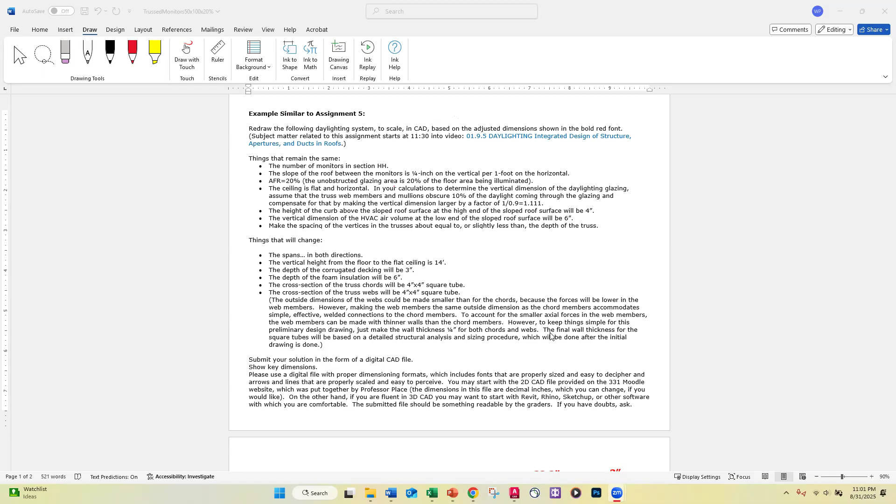So I'm going to go there, and while I'm here, I'll make another point I forgot to make earlier. I've done some projects like this, and one thing that turns out is you can do this whole window framing system, glazing system, as some variant of a curtain wall, or as what we call storefront. Both systems have a bunch of vertical mullions used to join the pieces of glass along the vertical connections, or the so-called head joints in the glass. So you have mullions top and bottom, and then a bunch of vertical mullions.

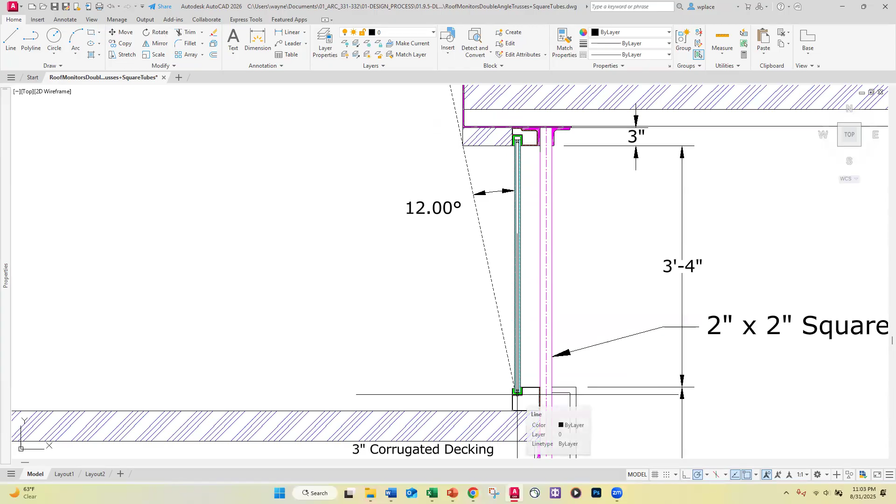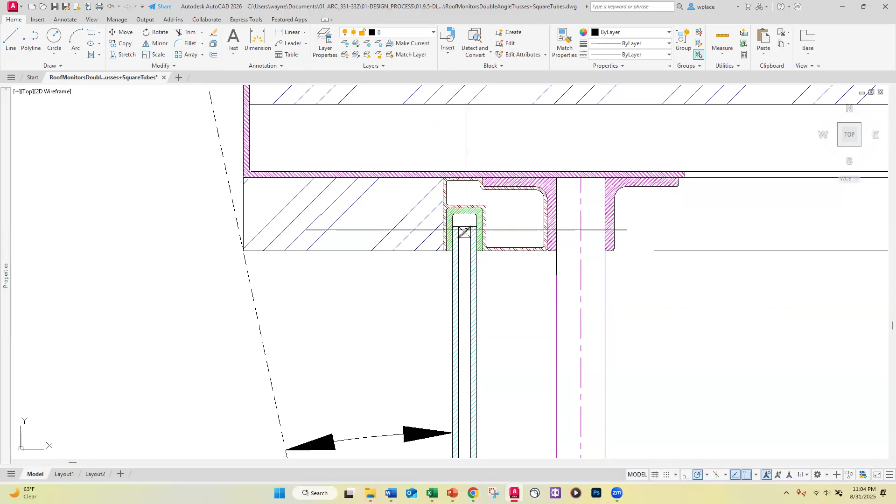You'll notice, by the way, in this troffer down at the bottom, I didn't make it as deep as the one at the top, because gravity is going to cause the glass to stay down in this 3/4 inch deep troffer. On the other hand, near the top, the structure deflects some under loads, which can be variable, like live loads of people walking across the roof, or drifting snow loads that produce unexpected deflections. To keep the glass from falling out, or alternately being crushed, we have to provide an airspace above it. So I put a half-inch airspace up there between the neoprene gasket and the top of the insulated glass panel. So that is our structure, our way of waterproofing and holding the glass in.

Now, the horizontal glass will run for a certain number of feet, which in our case probably is from one vertical web member to the next. I say that because we're probably going to put in a silicone head joint between the two pieces of glass that meet there. And while that silicone head joint is not visually terribly obtrusive, it will be visually apparent. If we put it in front of a vertical web member, it's less likely to be noticed. So we're lining up that head joint in the glass with the vertical web member, so the joint between them won't be a mullion, it will just be a silicone head joint.

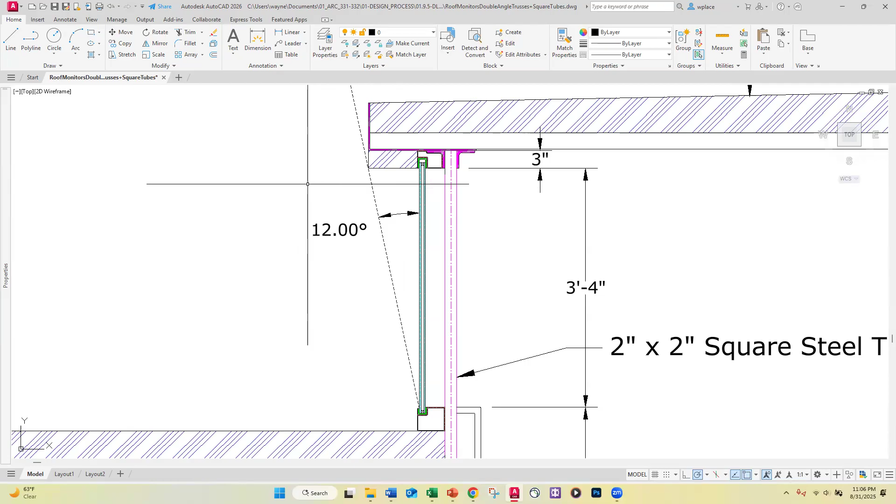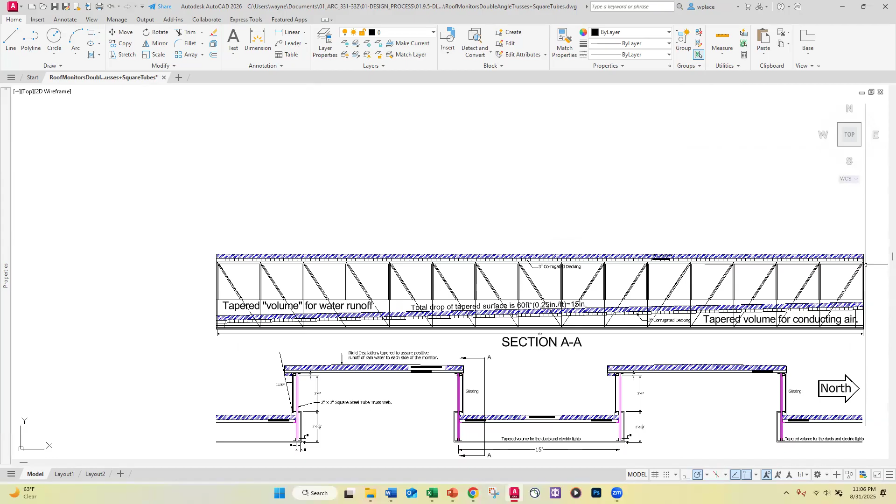All right, having said all that, now I'm going to start trying to set up our 100-foot long version. I'm going to put in a line here, and start drawing that line. I know that 100 feet is 1,200 inches, and my basic units in AutoCAD are inches. So there is a line that represents the center, the joint-to-joint dimension, which was literally from right there to right there.

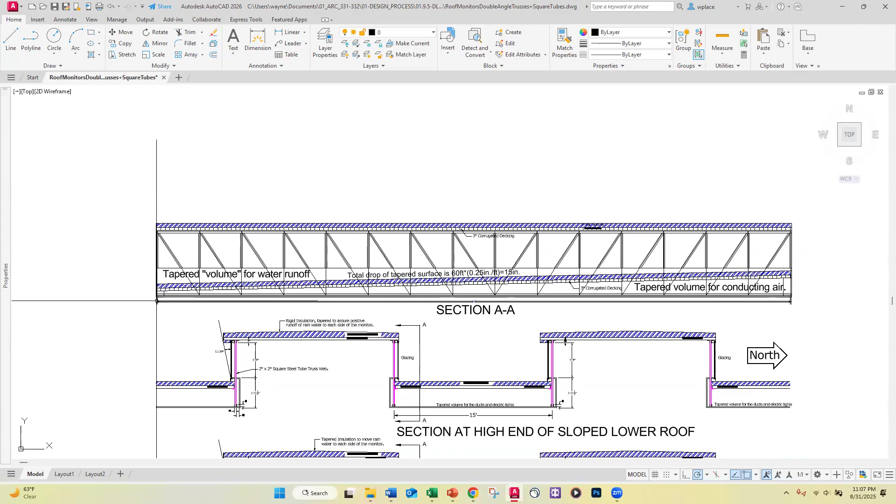Keep in mind, there'll probably be a column under this end and a column under that end, and we typically put the columns on a nice clean grid, like 100 feet. That means we'd like for this end web member, which is carrying all the load of this truss, to be aligned with the column down below.

Everything that structural engineers do works off the center lines of these members. Now typically architects want a different kind of dimension. They want to know the dimension from the top of the top chord to the bottom of the bottom chord. And in fact, for standard trusses, that's the way they're typically sold.

So the architect will specify the depth of the truss. The engineer will look at all the other situational issues and figure out where the centroids of the top and bottom chords are, based on some initial estimates of the size of those members. The engineer will then do all that analysis and come back and decide whether the original member dimensions were adequate. If they are, the architect doesn't have to redo this drawing.

But the key point is to remember that architects want to work off of attachment surfaces, like the top of the top chord and so forth. But the engineer sooner or later has to get down to the centroids. So we're going to start drawing this whole thing from the centroids.

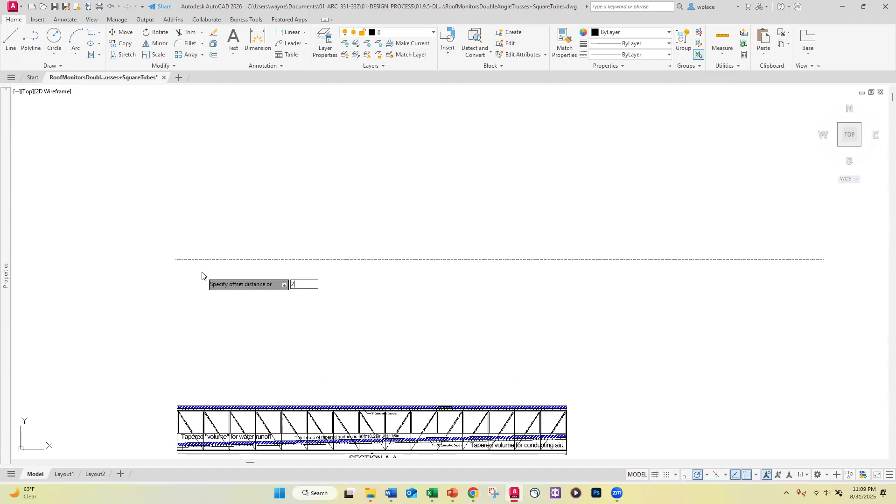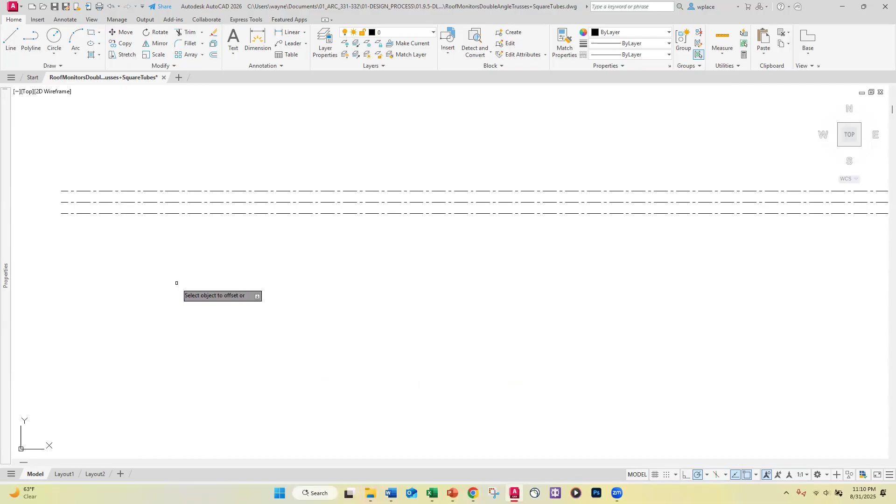So in the example I'm working, we've said that this member is going to be 4 inches deep. So I'm going to do an offset here, and I'm going to say I want 2 inches, and I'm going to offset that in that direction and offset it in that direction. Now that's the top and bottom of those chord members.

And now I don't want the dashed lines anymore. So I'm going to go back and pick a continuous line, and that defines my member.

So I have said in the past, for simplicity of this whole drawing process, we're going to put a half inch ceiling down below. So I'm going to do an offset of 0.5. By the way, in AutoCAD, you do an offset by typing the letter O and hitting return, and then you put in whatever you want that offset to be. So in this case, I made it a half inch.

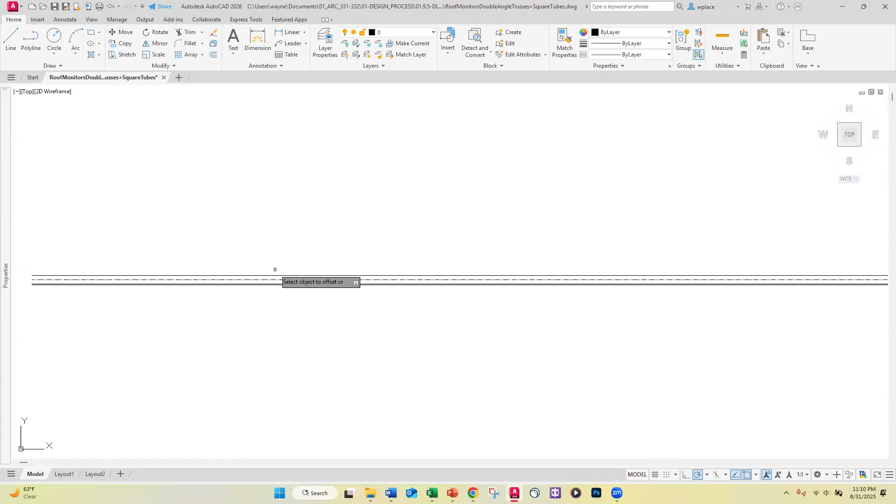So that half inch gap right there represents the sheetrock ceiling, or it's a placeholder just for the moment to remind us that there is a surface there. Okay, so now...

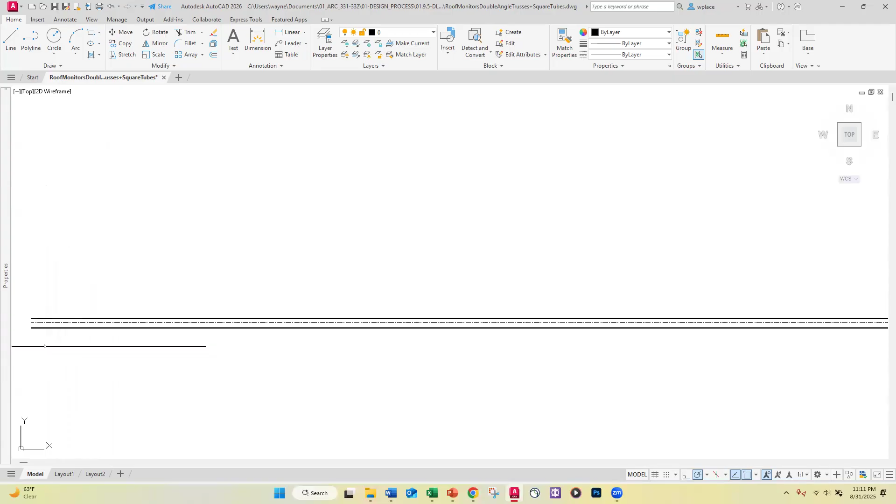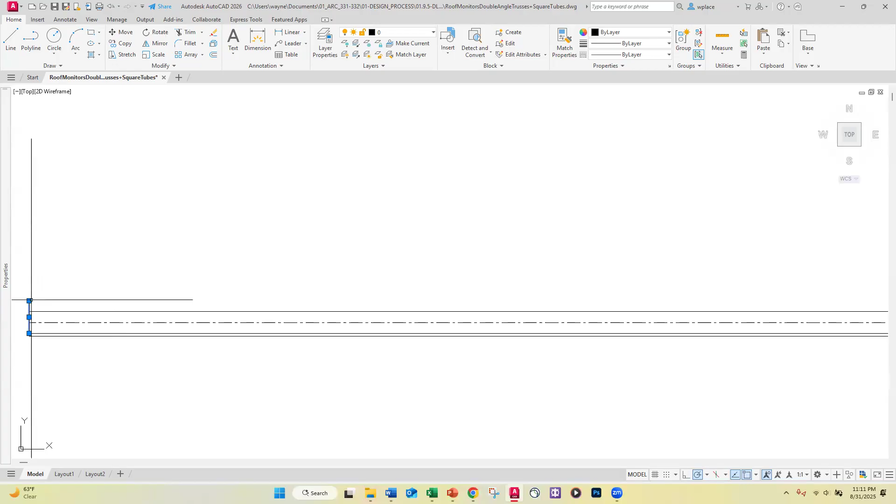Another interesting thing was that we said we wanted at least 6 inches for airflow at the end. So I'm going to come here and draw a line, a vertical line, and go up 6 inches. And then I know that my sloped roof, the bottom of the corrugations, are going to be at that point right there.

Now, I also said that I worked out the numbers, and oh, let me do the following. I have provided for you online, and I may update the numbers a little bit, but this is a glazing dimensioning tool.

And we're looking at 2 roof monitors per bay, and we've said the bay is 50 feet. As I said, you could go do this with 1 roof monitor per bay, and you could make this 25. And then we'd come over here and say, okay, we only have one of those. And then we get the same answer either way.

But I'm working with this portion here that says 2 roof monitors per bay. So that tells me that... sorry, I did something wrong here. Let me walk through this and you'll see what I'm talking about.

Okay, so the crucial line here is line 16, and I'm saying the length of the bay is 100 feet, where the length is parallel to the apertures. The width of the bay is that perpendicular direction, and it's 50 feet. And then I multiply those two numbers, so you see that in the formula up here. It's A16 times B16, which gives me the floor area that I'm trying to illuminate.

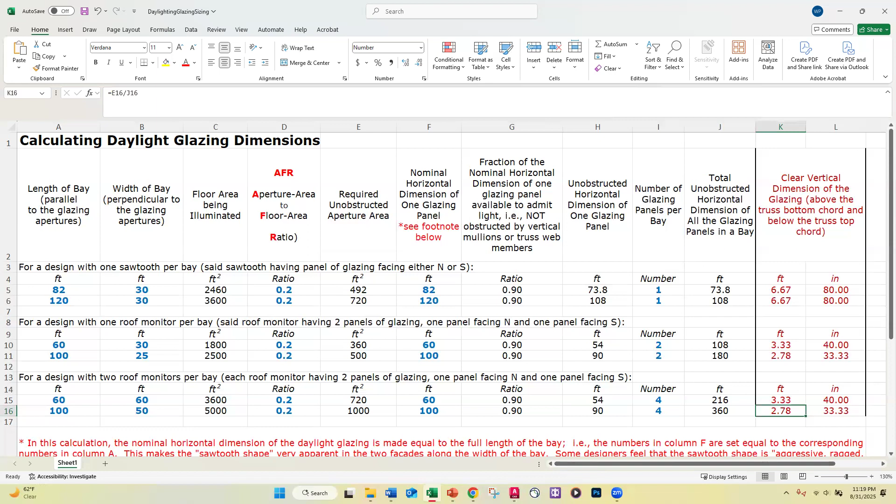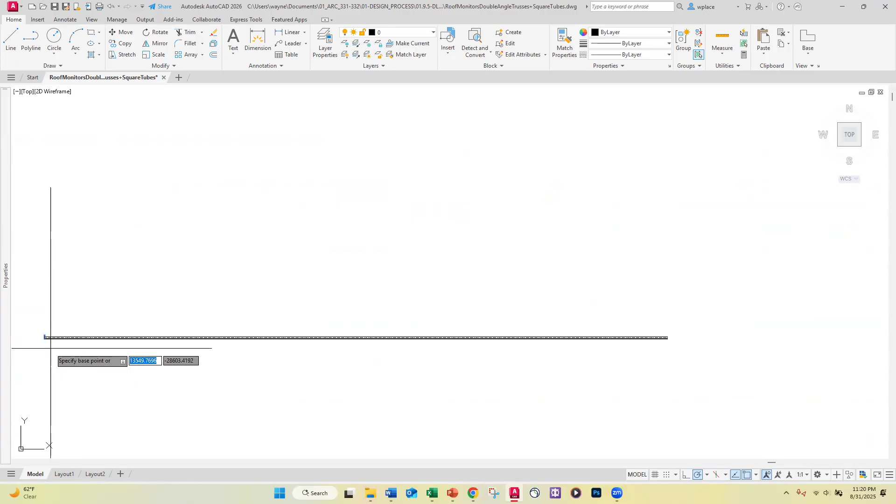So now I'm going to go back here and draw a line. And by the way, for the moment I'm going to bring this - I'm going to copy that over to there. And now I'm going to go back to this.

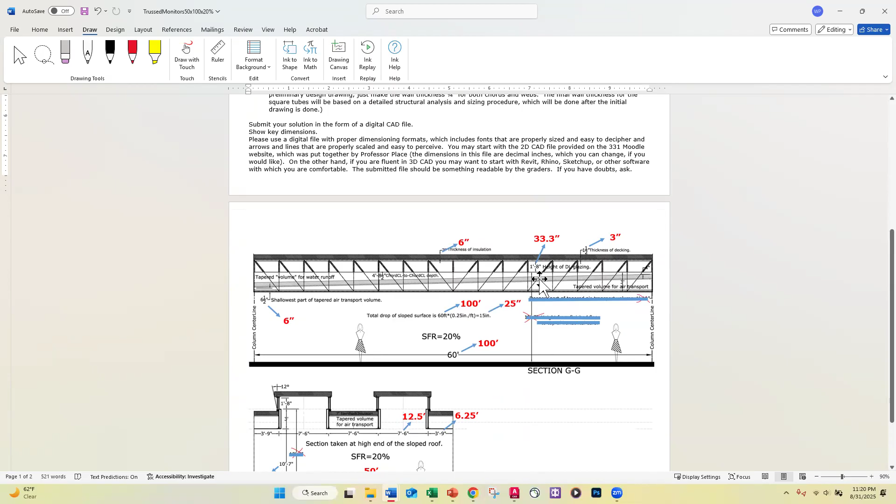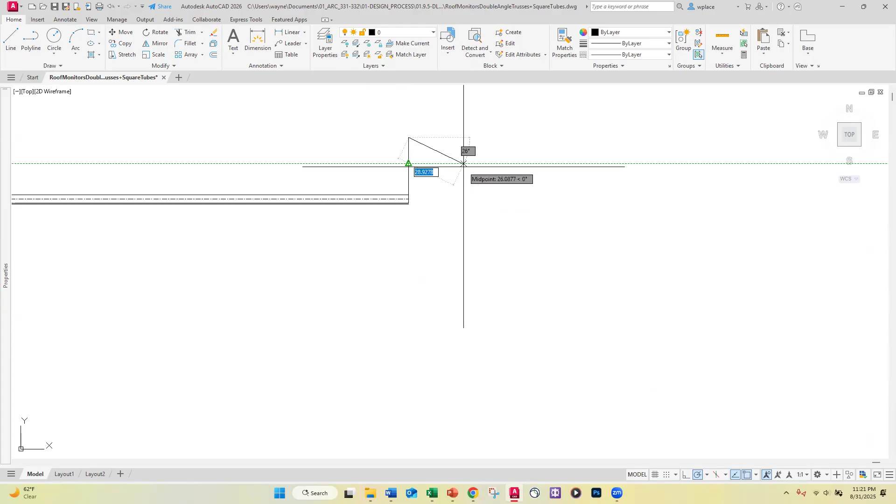You'll recall that we ran this number, 100 feet times a quarter inch per foot is 25 inches. That's how much higher everything is at this end compared to that end. So when I come back to my drawing, I'm going to draw a line and make the length of that 25 inches. Now I know that the sloped bottom surface of the corrugated decking is going to go from there to there.

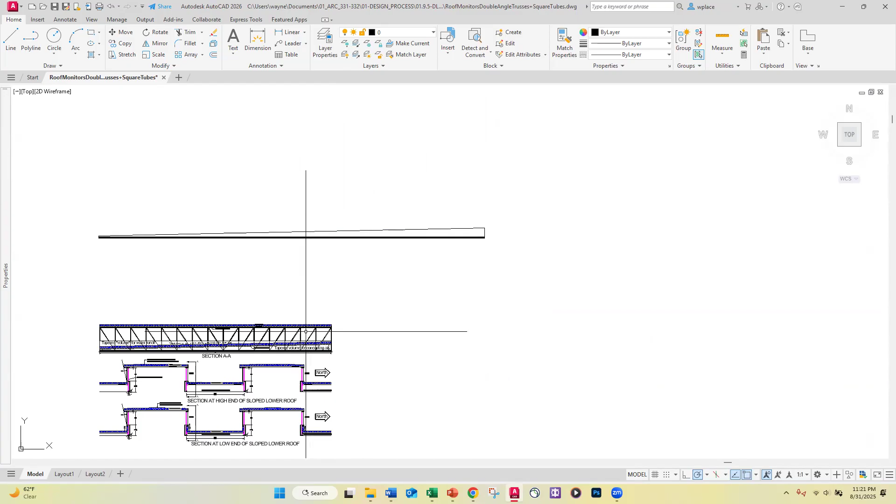So in this example we had a 15-inch rise. In this example we have a 25 inch versus 15 inch. So you can begin to see all of this is scaling up the appropriate amount relative to this shorter bay.

Okay, so now I'm going to do my offset function and put in 3 inches, and that's my corrugated decking. And then I think we said the insulation is 6 inches, so I'm going to do the offset of 6 inches. And this is - whoops, didn't do that right.

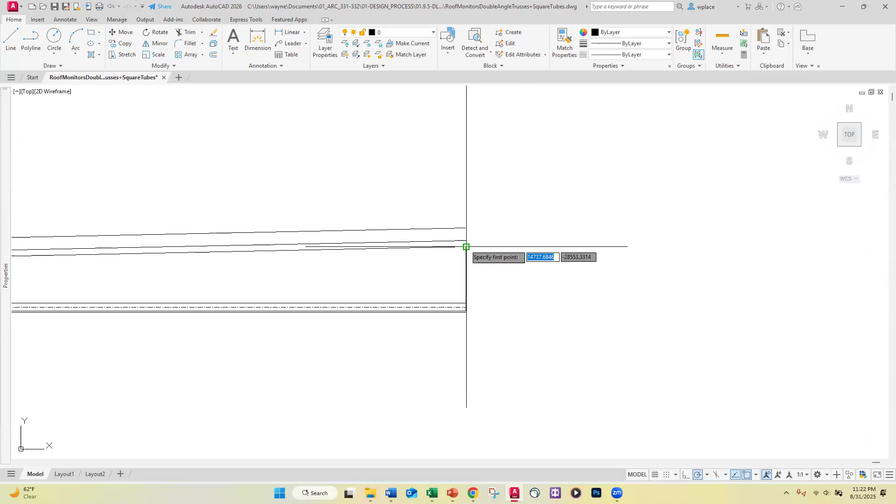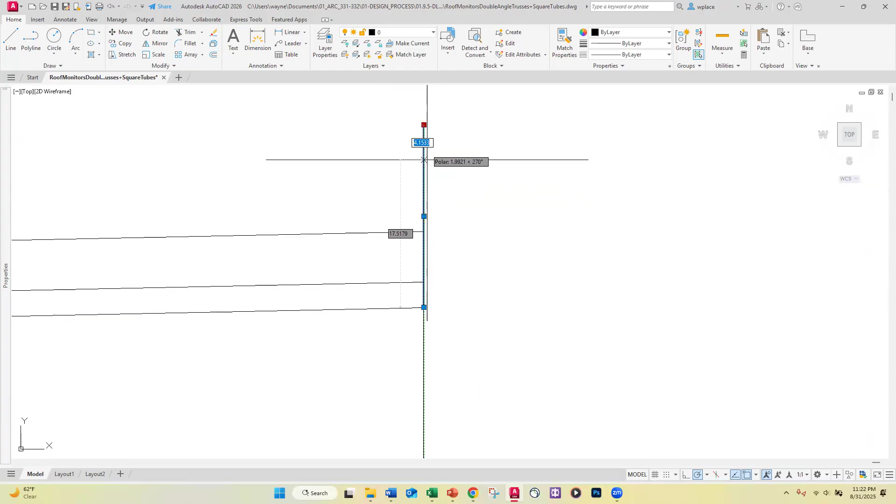That's the 6 inch insulation. Now, when I did those offsets, they kind of pulled away from the vertical at this end. So the way I'm going to fix that is extend these two lines until they get to that line, and then close those off like so. And then we got to go do something like that at the other end.

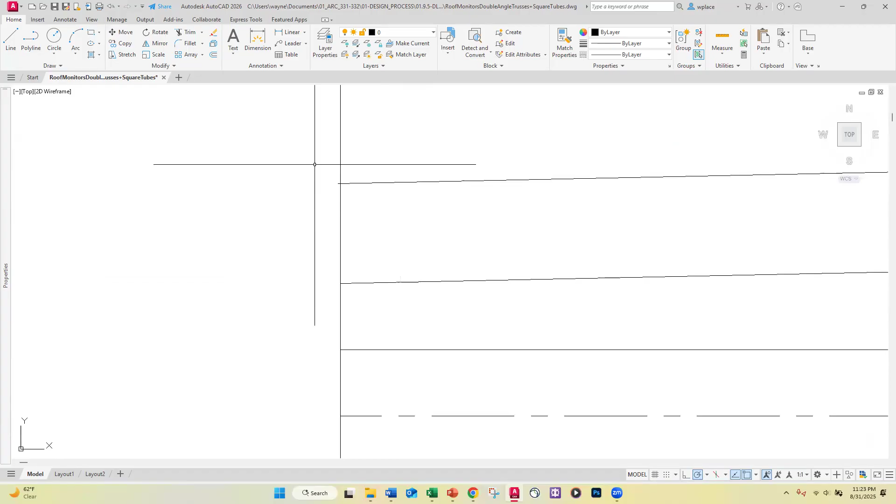It's up there, we're going to be trimming. In fact, what we can do is say fillet, and we'll take this line and go up and connect to that one. And now we're going to have to trim a little teeny bit right there.

In reality, of course, the builder might never make such a delicate cut and will sort of cut it coarsely and manage to make it work one way or another.

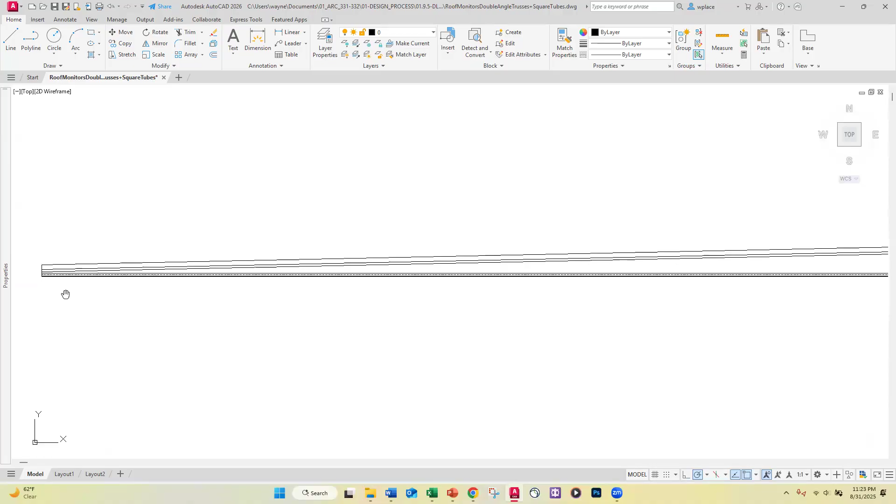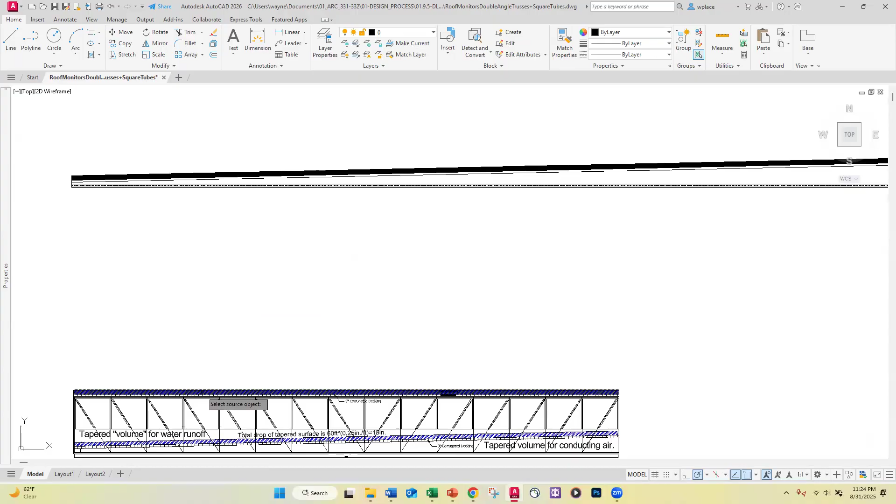Okay, so I'm going to come here and hit H for hatch. And then I'm going to come and match, MA. That to that. And that's the symbol I'm using for my insulation.

Now, I also did something else on this drawing, which is not a very good drawing, but I'm going to do it this way anyway. I'm going to hit hatch.

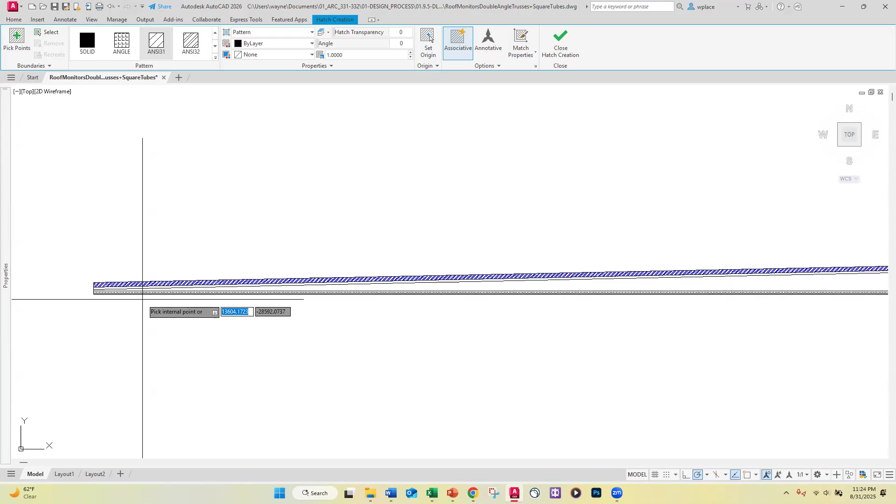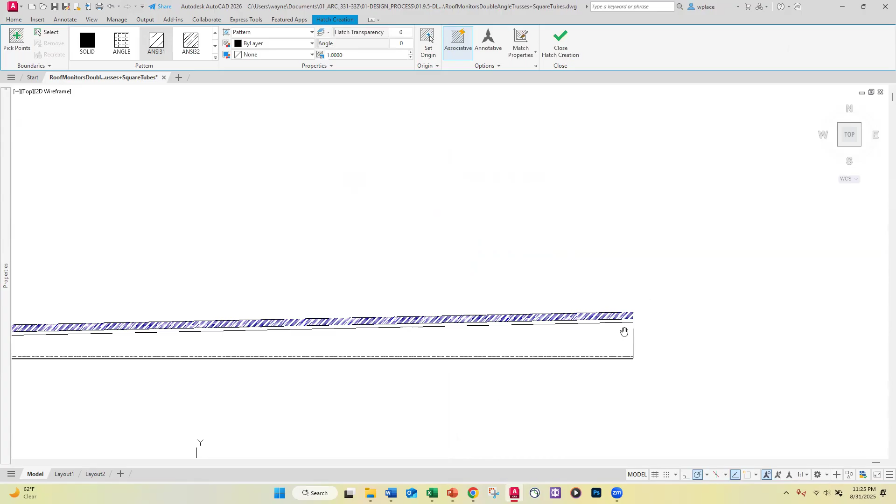This is one of the annoying features of AutoCAD, that it occasionally tells me there's not a closed boundary, but there should be. The nice thing though is they have this new feature where I'm going to just close this. So I hit close and maybe it'll do it. And it's still telling me that something isn't closed. All right, so I'm going to say...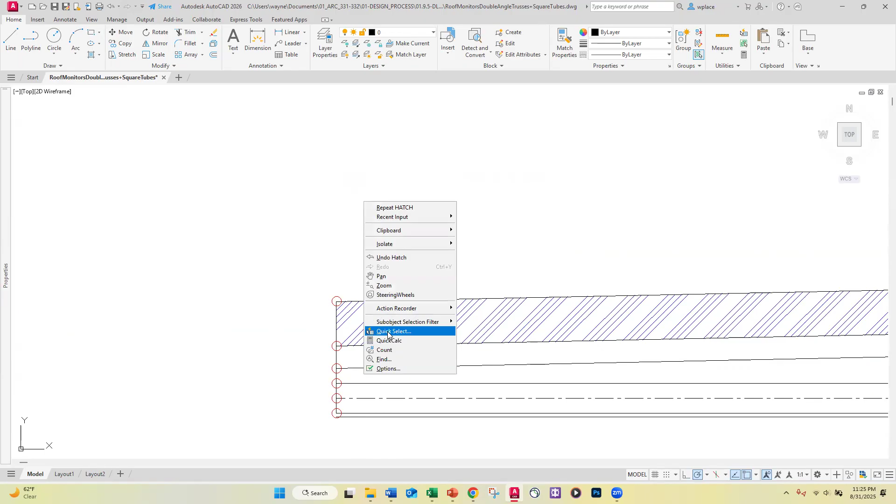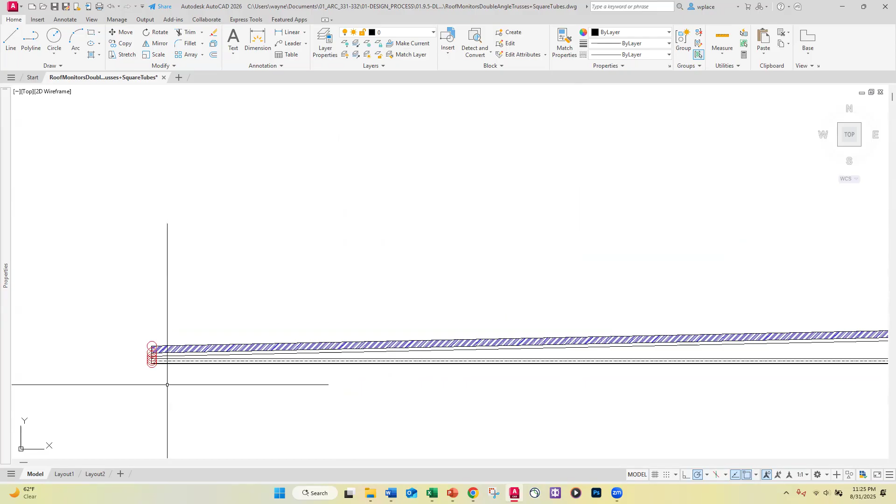All right, I'm going to do this the really hard way. I'm going to take a polyline. I'm going to click right there. And then I want to go way over here.

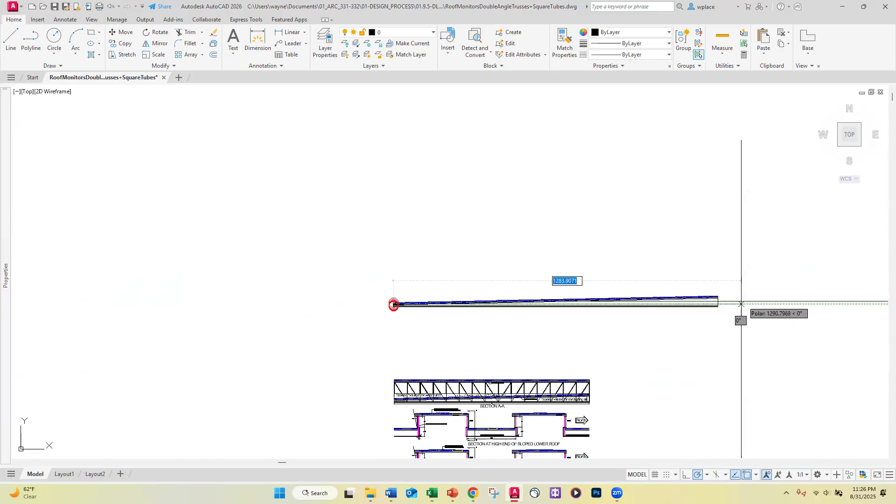Okay, so that finally worked. And now I'm going to go get this weird looking hatch.

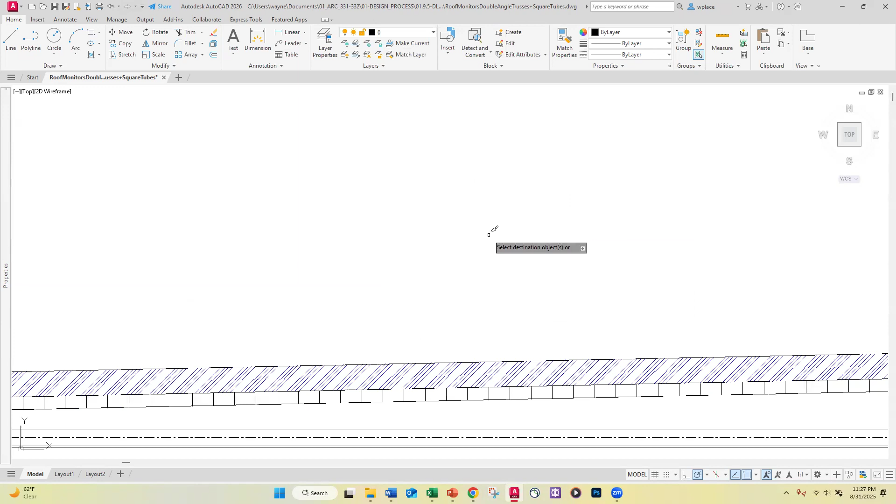Typically, if I'm really serious towards the end of this drawing process, I'll draw a piece of this that shows a little detail of the corrugations. But for right now, I'm just putting these lines in there to represent the vertical web material of the corrugations.

And this is what I'm using as a non-standard format, but it kind of works for the preliminary stages of this kind of thing. So now I've got the corrugated decking right here, the sloped insulation right there.

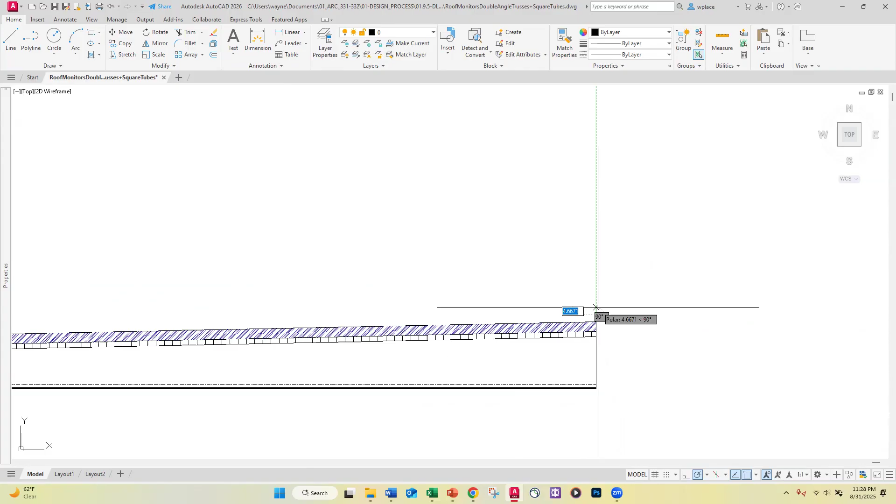All right, now I'm going to say the curb needs to be about 4 inches at the top. So if I'm going to do that, I'll come and put a line here that's 4 inches high. And then I'll come out from there and say that's the top of the curb, which also defines the bottom edge of the glazing, or roughly.

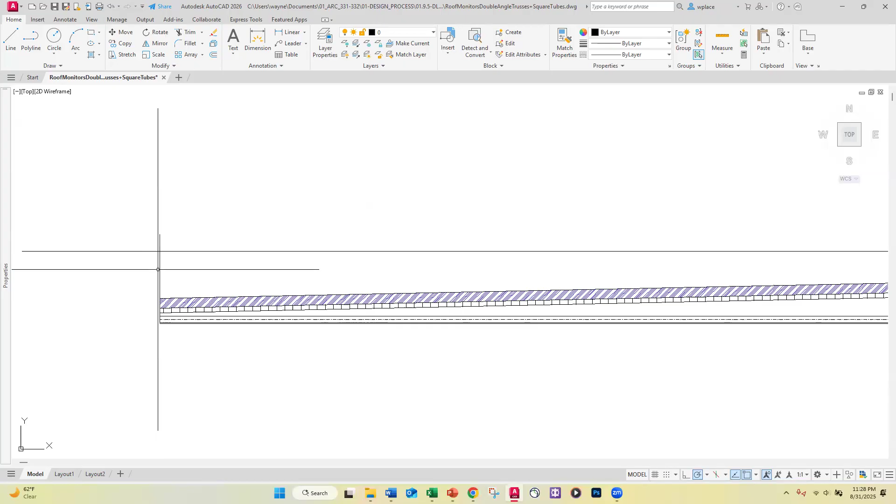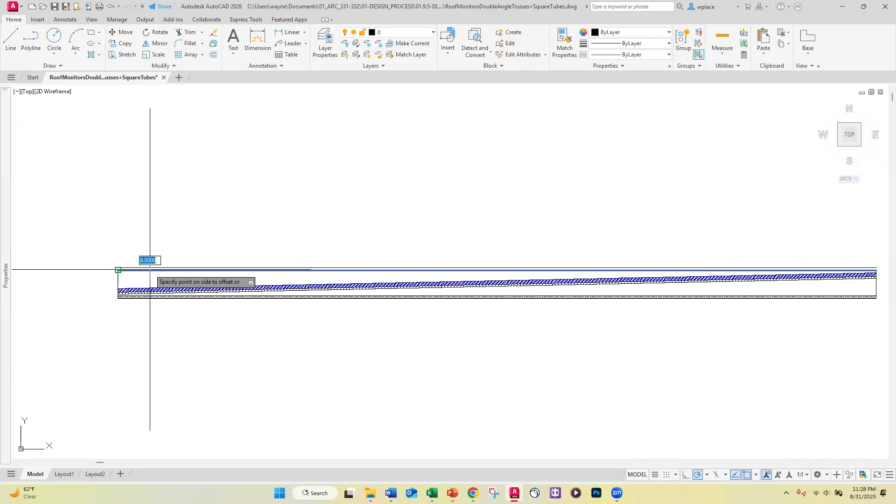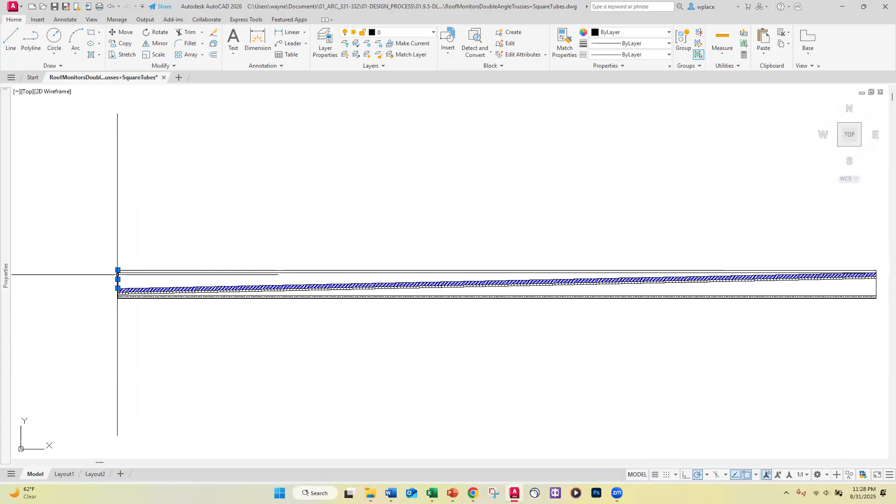So now I'm going to click F and fillet these two things. And now actually, if I go with the same detail that I drew below, I'm going to do an offset of 4 inches. And now that's that aluminum extrusion, which is 4 inches deep at the top, and that's forming the curb there. And then we have this additional height for the curb at this end, which is that 25 inches.

Okay, so now we said the glass is 33.33 inches above that. So I'm going to do an offset of 33.33 inches. And these lines then define the lower and upper exposed edges of the glass. In other words, this is the vertical dimension of the portion of the glass that can let light through.

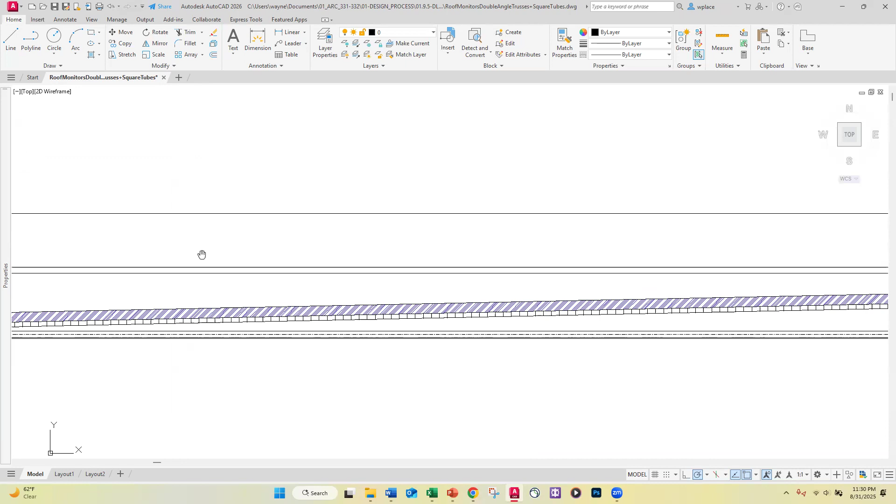Now the glass goes down and buries itself a little bit down here, and it buries itself up above. So it's actually going to be an inch and a half bigger than these two lines, but this represents the vertical dimension of the exposed glass. So now we get up to the top here, and we're going to have another mullion-like element, but we're also going to have the top chord, which in my case is 4 inches.

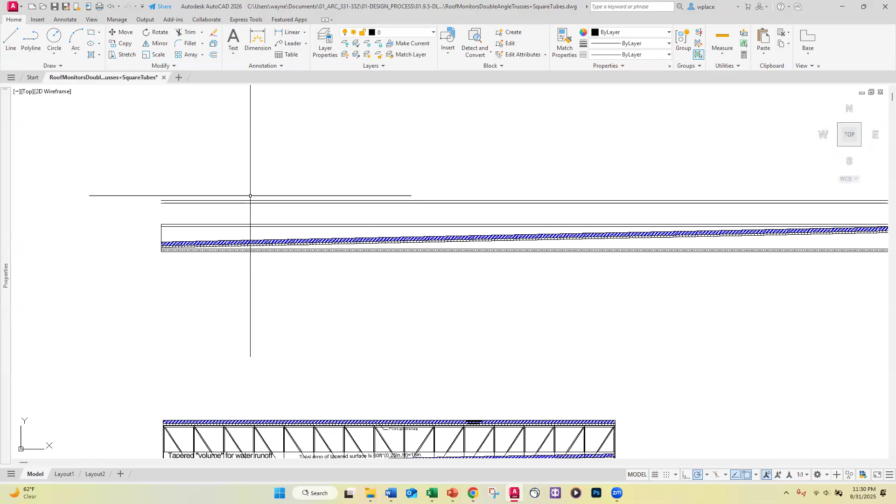So I hit offset and say 4 and enter. Depending upon where I'm taking my section cut, this will either be the upper mullion or troffer, as I refer to it. I showed this section here, so we'd actually be looking at that upper mullion.

But for the moment, I want to focus on the trusses because I want to size some trusses and see where we stand. So I'm going to come here and do an offset of 2 inches, and that becomes the center line of the top chord. Then I'm going to do MA for match and make that a center line.

Now I'm going to come along here and take this one, take it all the way down there and all the way up there. That is the center line of that vertical web. So then I'm going to match this to that. Maybe I shouldn't have done that right away, but now I'm going to do an offset.

I'm going to make it 2 inches, and now I'm going to come this way and that way. And that's the vertical web. Now I'm going to match this line. I want to impose its properties on that and that.

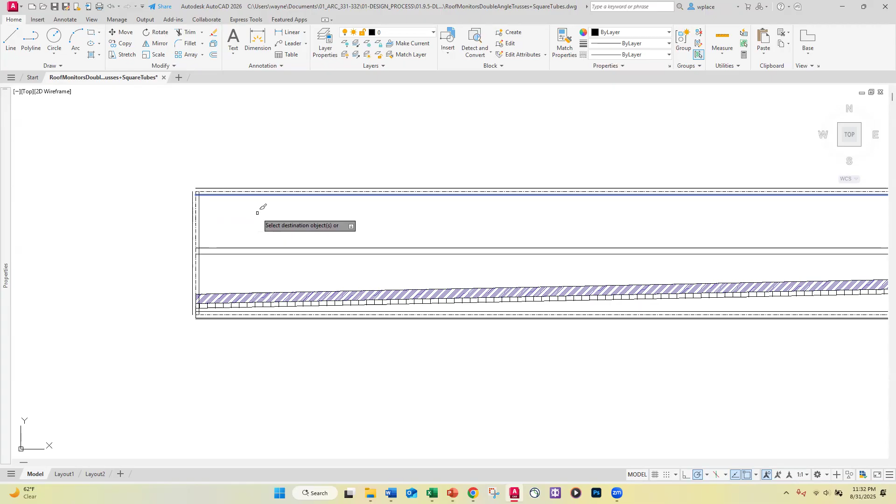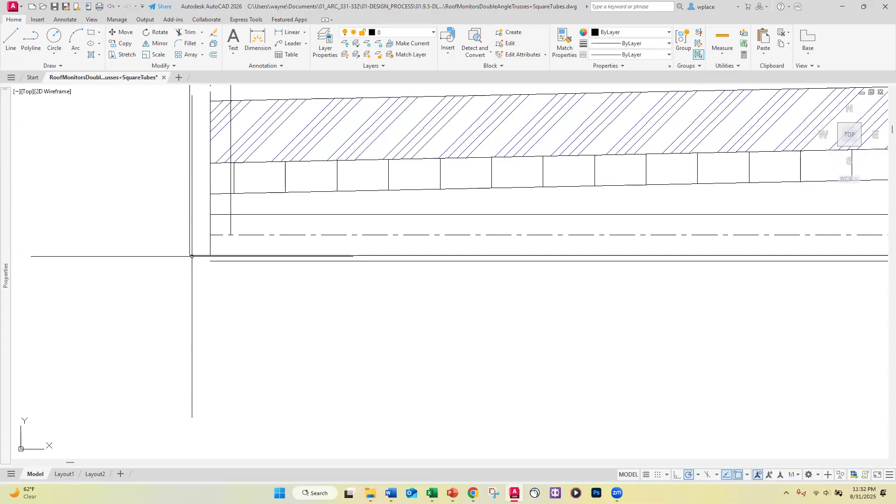And now I'm going to fill it, going from there to there. I'll zoom in here and fill it again, going from there to there. For the moment, I think I'm going to get rid of some of these - just those were construction lines.

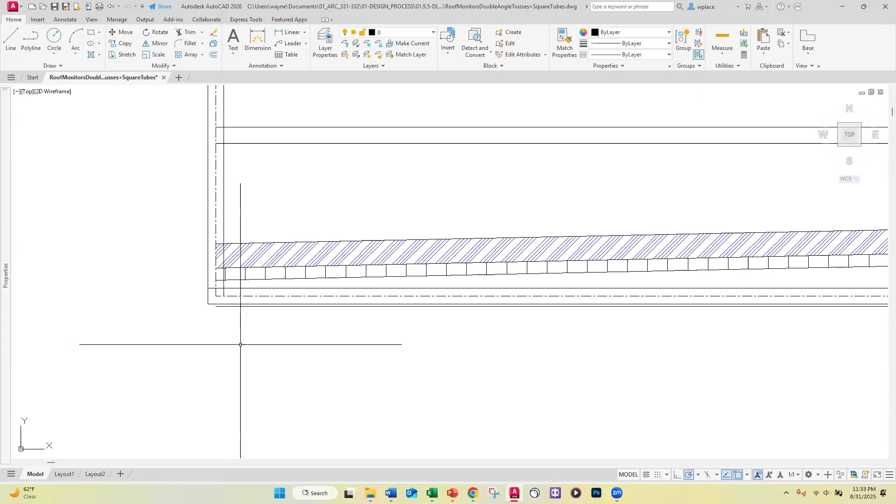But now I want to focus on this truss. Typically, the way we're going to do this, we might miter this on the corner, but typically that's not the way we do it. So what we might do is extend this line out to there, and then we're going to trim that right there, and do the same thing up here.

And then we'll extend that top chord, so the top chord is running all the way to the outside. Right now, I'm not going to worry about these right here, but they'll have to be detailed in some way where they go to the outside wall. You'll see why I'm going to put off doing that after I go through a few other things here.

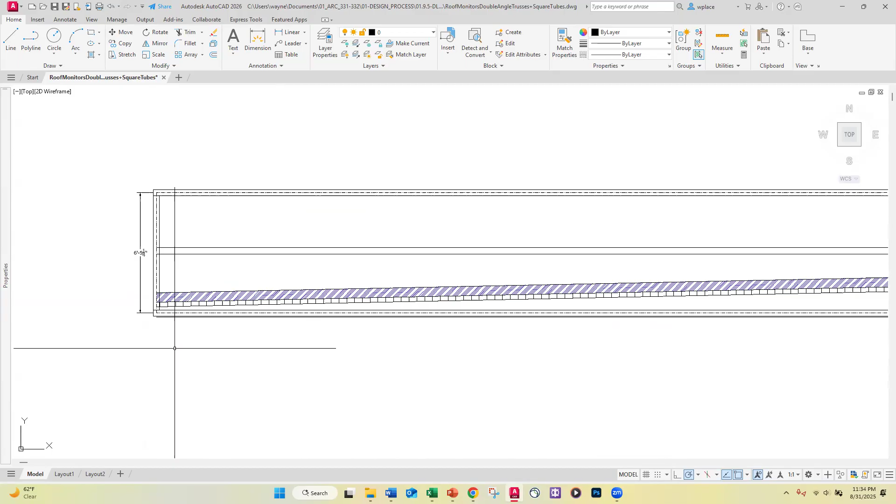So now I'm going to say this is 100 feet long, and now I want to measure the effective depth. So I'm going to do dim lin, dimension linear, and I'll go out there - it's 6 feet, 5 1/4 inches.

So I'd like to know what the proportions of this truss are to make sure I'm within the ballpark of all those guidelines we talked about. For parallel chord trusses, we said that the depth to span ratio can be anywhere from L over 24 up to maybe L over 12. It can actually be more than L over 12, but normally that's not practical because the web members start getting really long and they're inclined to buckle.

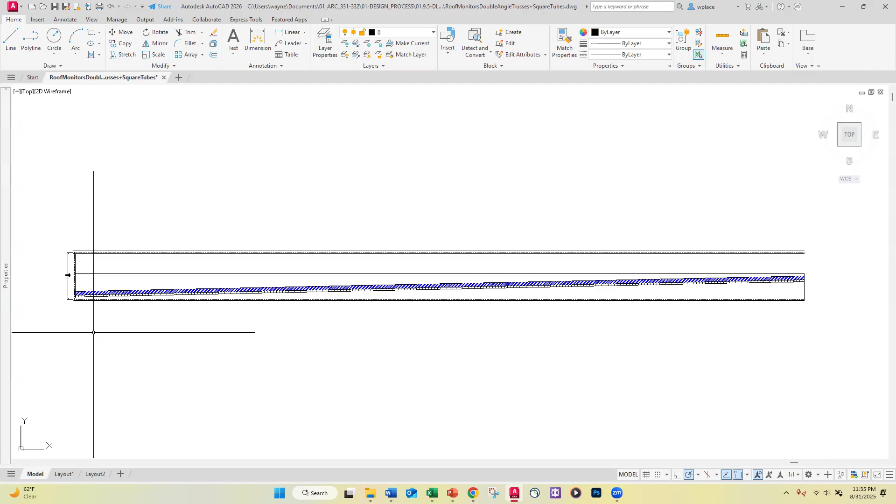So I want to know, am I in the right proportions here? I'm going to take the 100-foot long dimension, and this right here is about 77 and a quarter inches. So I'd divide 1,200 by 77 - I'm going to go do that. I just always like to keep an Excel open. I'm going to say this is equal to 1,200 divided by 77, and I'm getting close to 16.

Now, I would say 16 is a really nice, fairly deep truss, but that's good because we've got glass up in this truss. And if the truss deflects too much, the glass might crack. So I like the fact that this is fairly deep and fairly stiff proportions.

So what I'm going to propose is the following: we make our bays about square. A way to do that is to say, well, let's just divide 100 feet, which is 1,200, divided by 16, and that comes out to 75 inches. So we're going to make the spacing on the vertical web members 75 inches. It's a nice clean number.

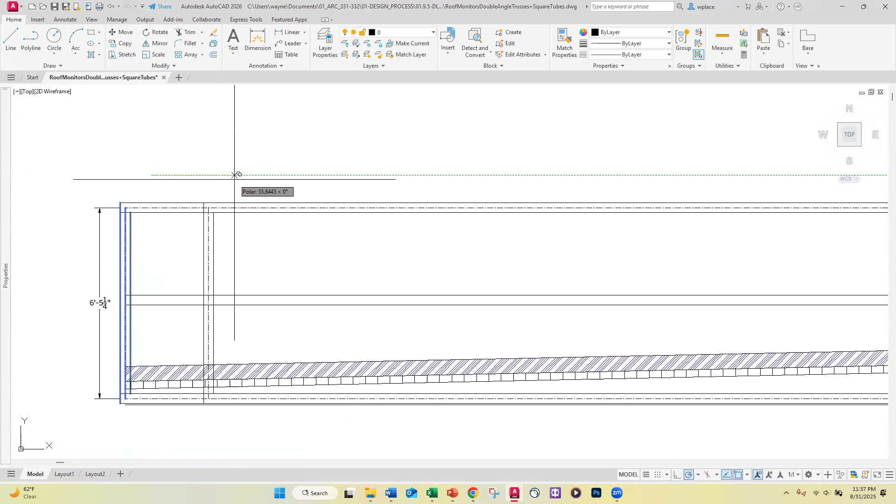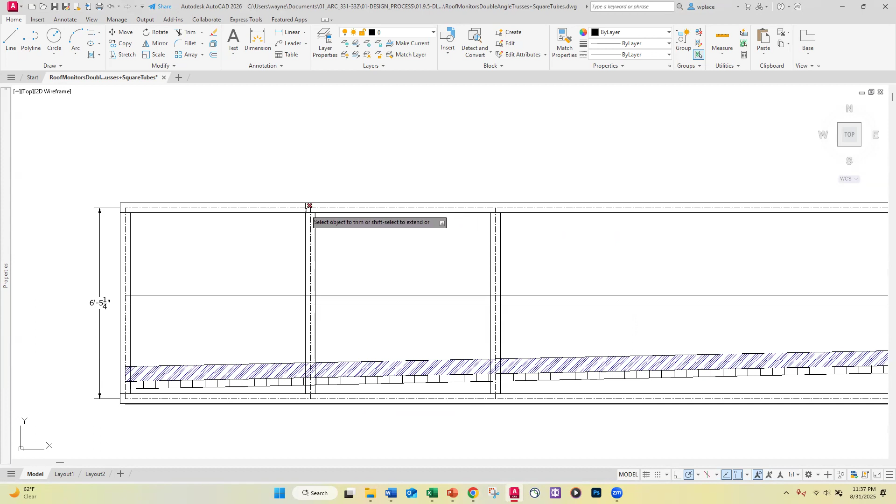So I'm going to take this and say copy. And now I'm going to trim, because I don't want to break my bottom chords or my top chords. I don't have the whole truss there, but you get the gist of it.

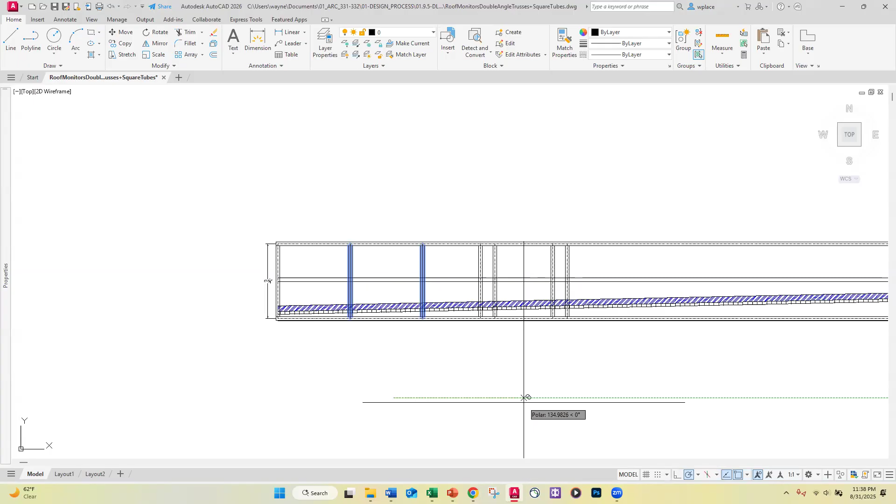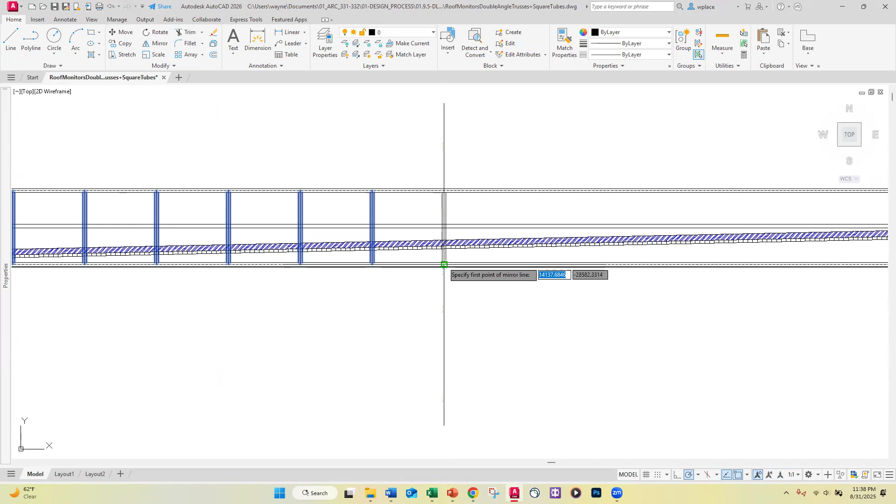I'm going to now say the following: so this is 8 bays, and then I can take all of this and do it symmetrically. So I think if I sweep in this direction, I'm going to mirror that around this line. Nope.

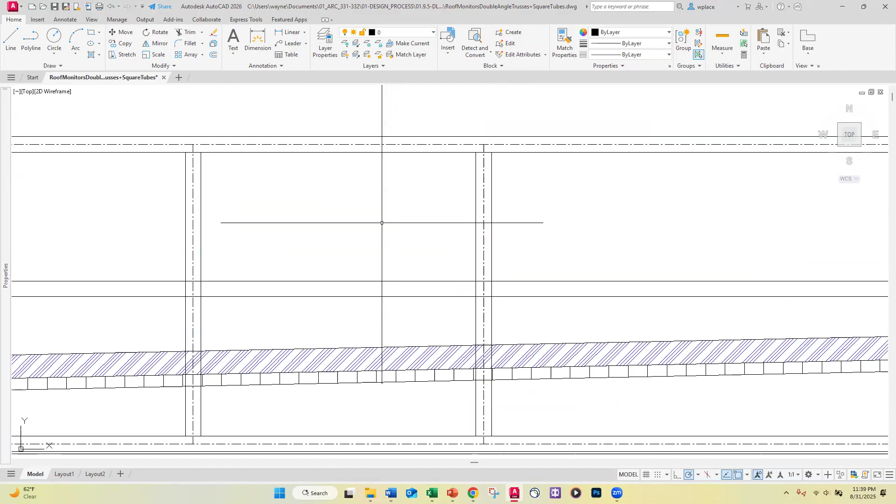Well, boy, I think I'm getting tired.

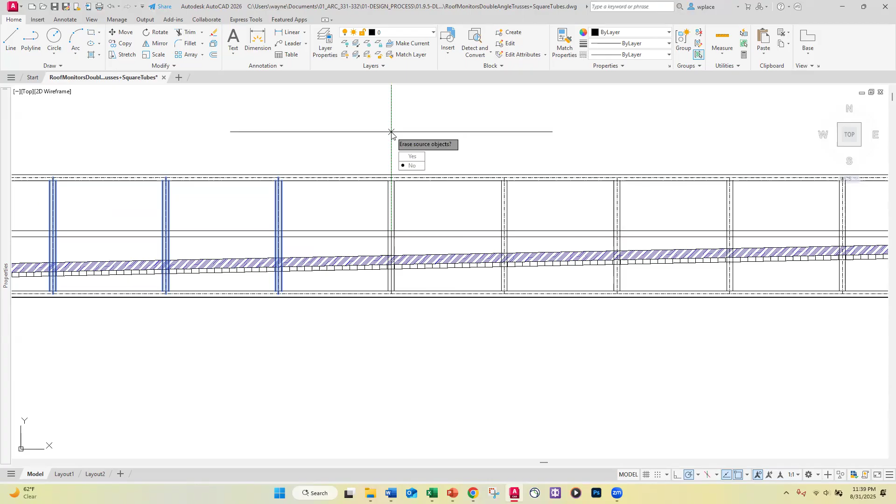Now we have a rule when we do trusses that we would like all the members intersecting at a given point to have their centroids going through a single point. And we call that the working point.

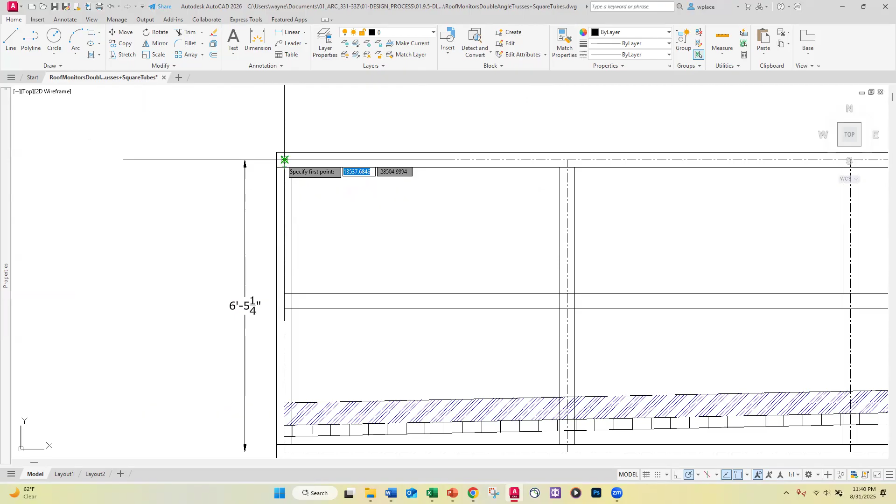So I'm going to show on this drawing what the working point is. There's a working point, and there's a working point. And that's the center line of the web. Now I'm going to do an offset of 2.

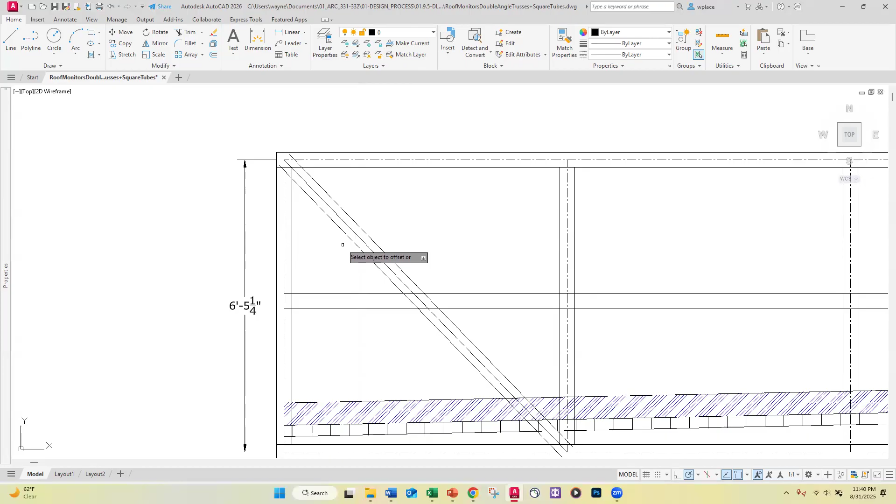And I get that, and that. Now again, I'm going to do some trim here. So I'm going to take that and that, and this and this, and say trim. And now I can get rid of all that.

I'm going to match the properties from there to there. And we would take all of this and copy that from right there to right there.

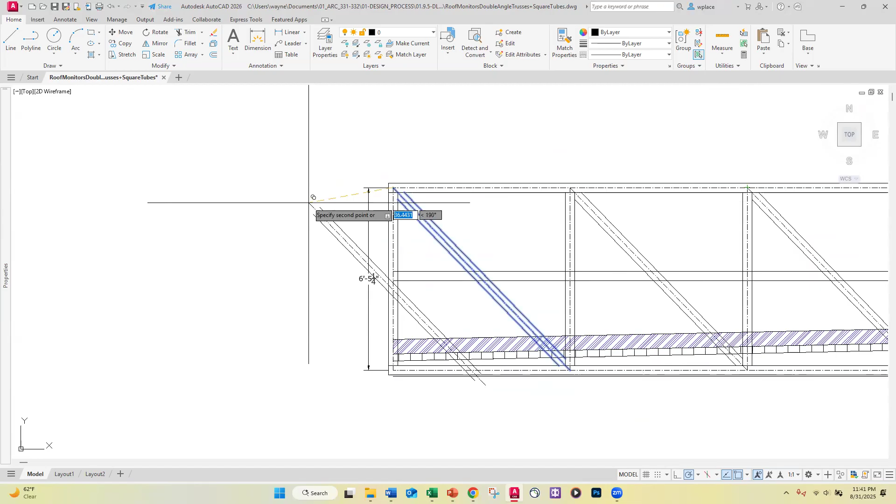I'm not going to draw these in right now. So, given where we took that section before, we won't see these members where they're obscured by the decking and the insulation, but we will see them underneath here.

Let me go see this section here. So we're going to see the bottoms of these trusses, and then we're going to see those web members, and we're going to see every portion of the web member above that point right there.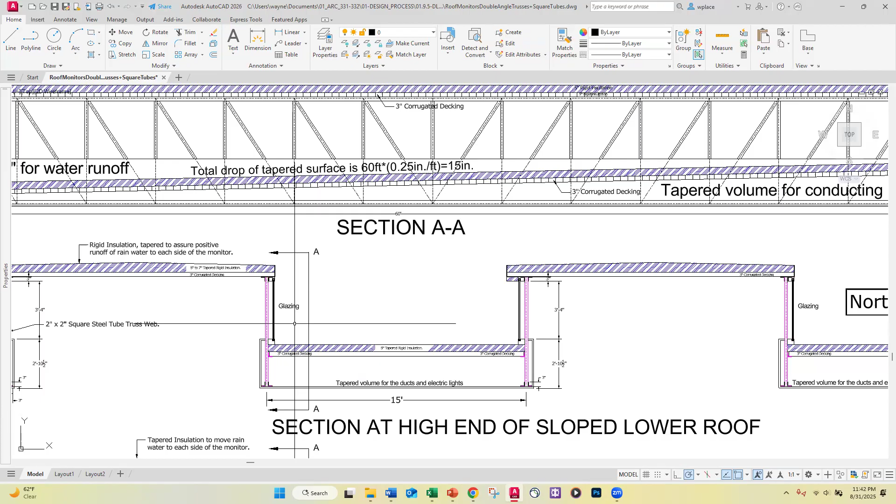Okay, so this is the new truss, and I don't know what I did right here. That was weird.

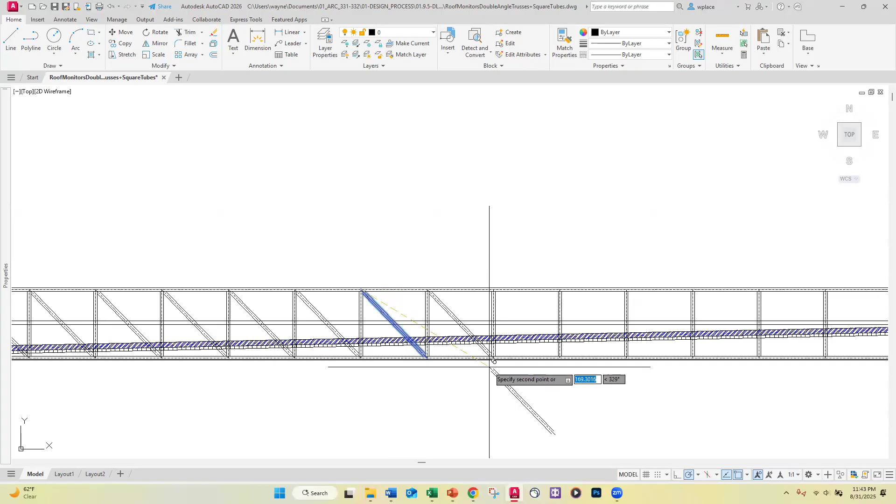I'm going to do the following. This will get me to the halfway point. And then I'm going to take this one and mirror that right there.

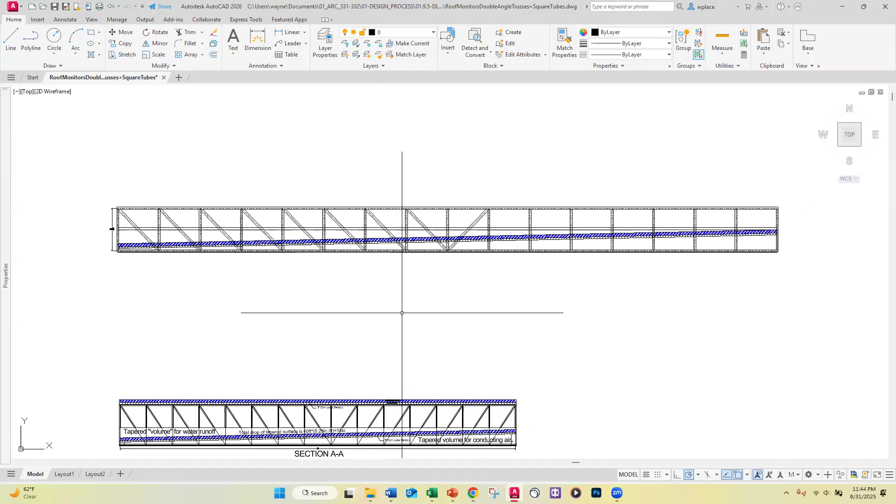Okay, so we will now copy this along.

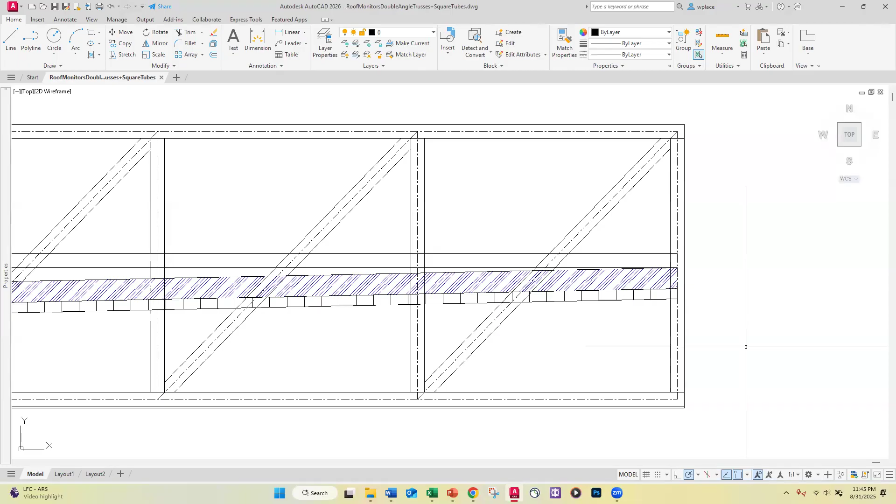Okay, so I'm going to just check some things here. That's 2 feet 9 1/4 inches. I hope I did that right. Oh, there's something wrong.

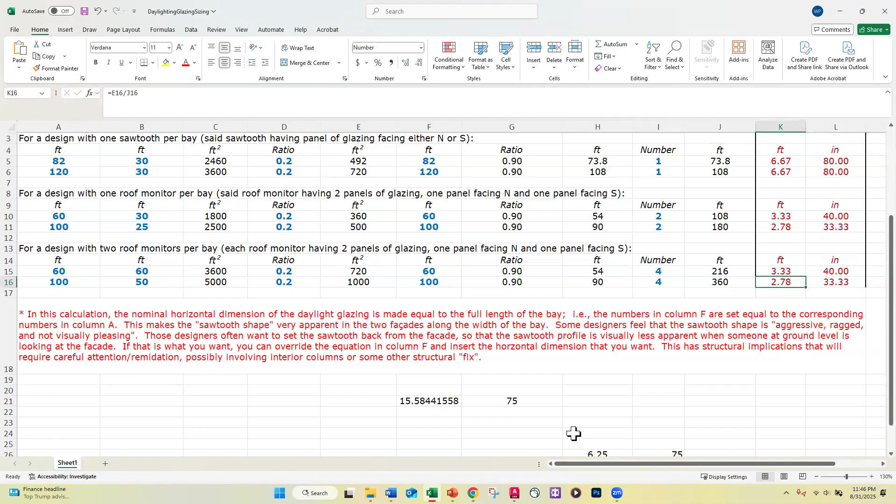Hmm, well, that's not good. I'm almost certain I offset that by 33.33.

Okay, well, I might have to make some major corrections here. It's midnight, I'm getting a little tired, so I'm going to let it go at that. I'm going to develop this, and some of you, while working on this, maybe you'll figure out what I did wrong. That's a simple offset function, though.

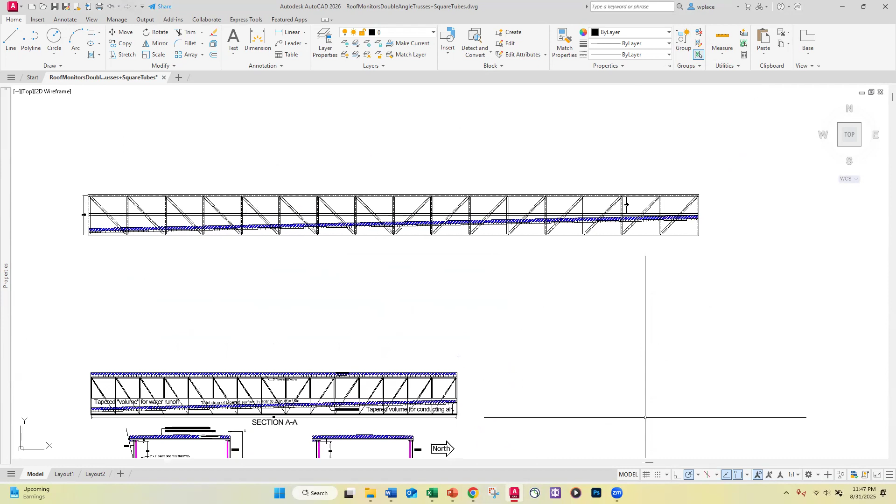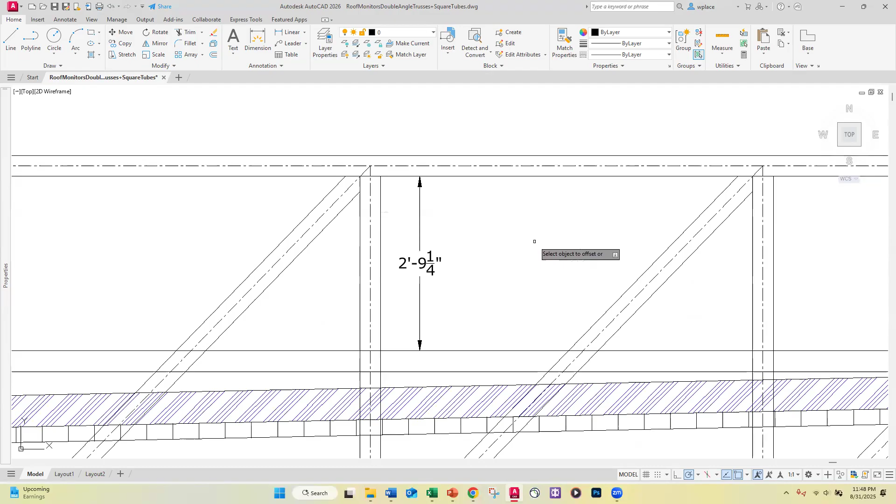Let me try something here, one more time. I'm going to do an offset of 33.33 inches. And I was supposed to go from there up to there. Whoa, okay. So that's exactly what I wanted it to do.

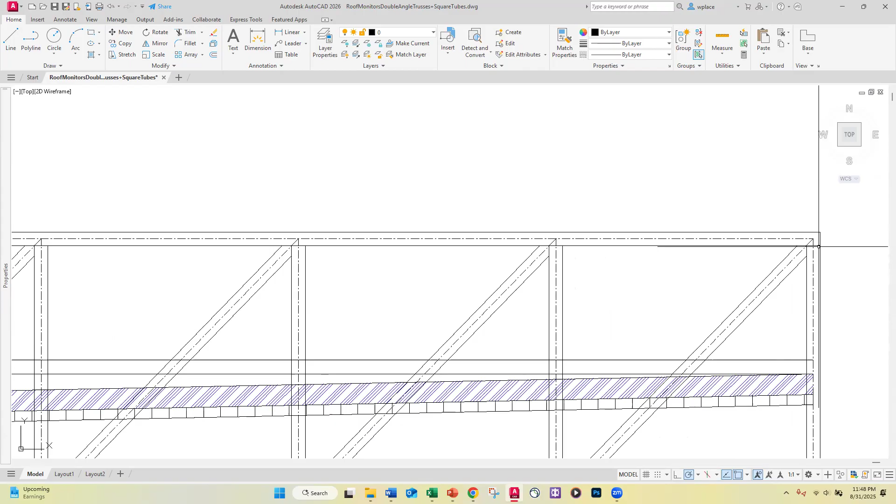So here's the problem. I said the dimension of this. Let me do this. 2 feet 9 1/4. Oh, of course, it's correct.

Because if I take 0.78, this is fractional inch, fractional feet, 0.78 times 12. And I got to put an equal sign in front of that. Okay, it's 9 1/4.

I think I'll have to check what fractions of an inch I've got the AutoCAD file set to. This is not 9 1/4 exactly. So if I said, well, it's the closest thing, closest quarter of an inch, then this would be 9.25.

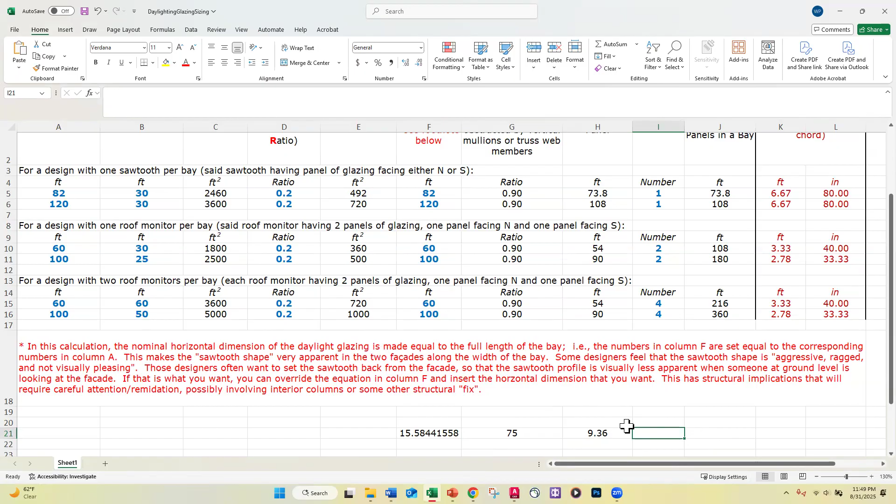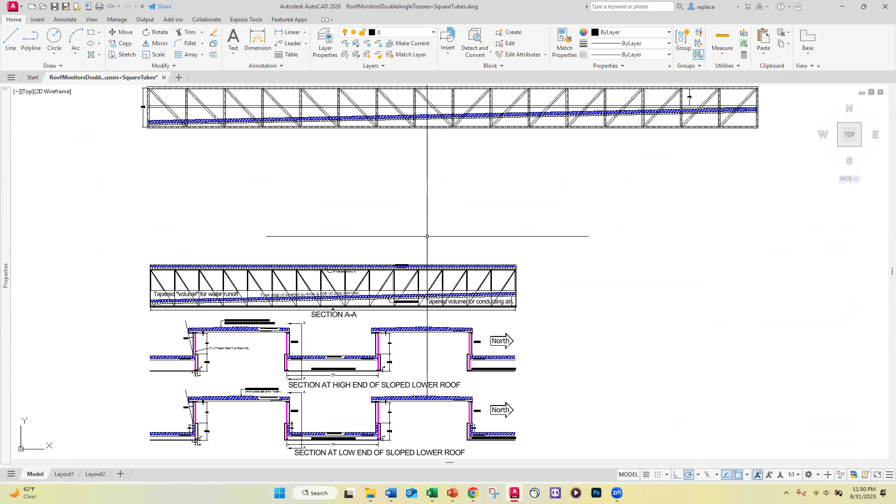Okay, so I hope that that helps. I know that some of you may not be very facile with CAD, but this will get you started. And I may go through at some point and do another little extension of this video where I draw these sections and put in all the square tubes. But that drawing will be simpler than this one because the parts will be simpler.

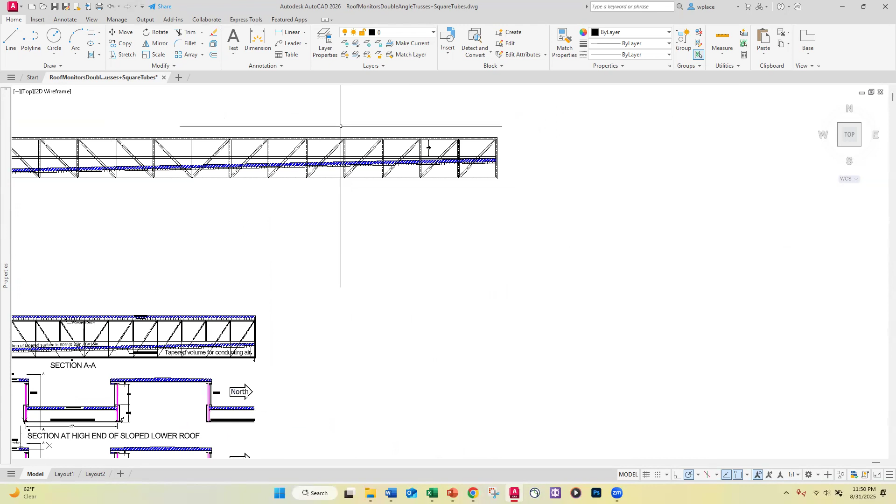Also, I suggest in your CAD file that you draw those over here, because a lot of the dimensions on this thing you're going to pull off of here. And I would have drawn it this way, except that at some point I was trying to give this drawing a shape suitable for a PowerPoint presentation, and it doesn't work too well if I put another big long thing out here. But that's an easier way to draw it.

One of the things I love about CAD is you can draw it out here, and then if later on you want to, you just move it over somewhere else. When we used to work on drawing boards, you didn't have that luxury.